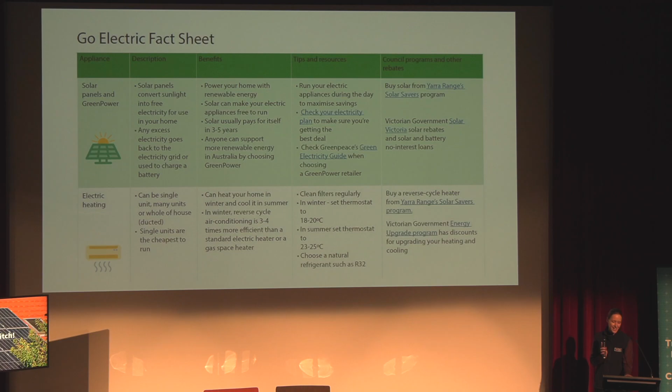And this resource also talks about what the systems are, what the benefits are, and it importantly highlights where you can go to have a look at the rebates that are available, because that's often something that's important and can really help. And so currently there are state government rebates for solar panels and hot water heat pumps, and they range from $1,000 to $1,400. And there are also interest-free loans available. But these change periodically, so it's important to know where to look.

And the last column also mentions the Solar Savers program, which is a council-supported program. Solar Savers was created when a group of councils banded together because they realised that it can be quite overwhelming for community members to know where to look. There's so much information out there, which installer do you trust? It can be very confusing. And so the idea is that this program exists to make it as easy as possible for you to install these appliances. So the idea is that they've done the hard work for you.

And there are currently 18 councils that are involved across Victoria that are involved in this program. So how it works is that you register your interest online. It's important to note that it's not just solar panels that this program offers, but it's also batteries, hot water heat pumps, and split systems. And so you answer a couple of questions that are specific to your home, and the Solar Savers team reaches out to you.

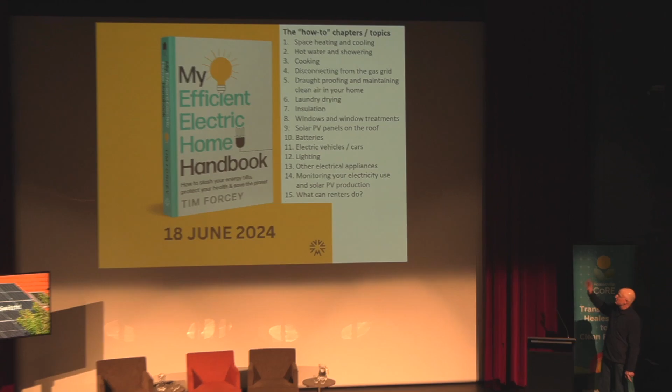Talk about my efficient electric home, how to be healthy, comfortable, and maybe even save $3,000 a year. So how did I get into all of this and this book? There's quite a few chapters in the book, and it goes through the whole lot, whether it's about heating and cooling or hot water or cooking or getting off the gas grid, but then don't forget the insulation and the draught proofing and the window treatments and the windows, and how do you maintain good air quality, et cetera. Then finally the solar panels, and should you get a battery, and what about an electric car? So there's all that stuff in there.

But how did the book come about? Well, what happened was 9 years ago, well, even before that, I migrated to Australia to work in the gas industry, and now I tell people don't use this stuff because you've got cheaper and cleaner and healthier options. I left the fossil fuel industry back in 2010, but in 2015 I had a casual research gig at the University of Melbourne, and we looked at a bunch of things. We finally got around to looking at home economics, and we looked at home heating. 9 years ago, we worked out that you could heat your home with a reverse cycle air conditioner for a third the cost of gas.

So why aren't we all doing this? It's like going to the store and there's a loaf of bread, and there's another loaf of bread that costs 3 times more. Which one would you buy? So heat your home with a reverse cycle air conditioner for a third the cost of gas. And now I'm still banging on about this 9 years later.

One problem: when we published this report, we got a little bit of media, but we published it on the last day of winter. And guess what? The next day was spring, so nobody cared anymore.

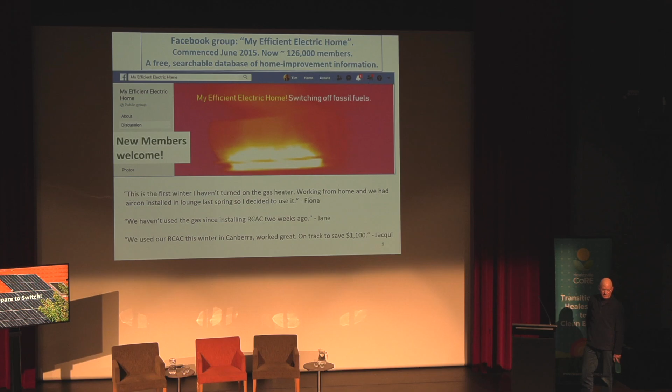You can get in there and ask, how can I bubble wrap my windows to make them warmer, and you'll see a discussion. But it's also probably the world's largest database on this sort of stuff because it's searchable. There's the little magnifying glass, so you could type whatever you want in there. Type in Healesville, or solar savers, or bubble wrap, or whatever it is, and you'll find posts going back 9 years. I can find the original post that I started this group with.

So it was a useful way to spread the word that people can save money by not using fossil fuels, getting onto a reverse cycle air conditioner. But it also validated what we had said at Melbourne Uni, that people could save a lot of money. Now we have tens of thousands of case studies of people who have electrified their homes, heating with reverse cycle air conditioners, saving thousands of dollars across the winter, like Jacqui down the bottom: 'We used our reverse cycle this winter in Canberra, worked great, on track to save $1,100.' So it was good to see the theoretical numbers we worked out at Melbourne Uni were actually coming true for a lot of people out there.

Another thing I started over the last few years is a business. I actually go into people's homes and offer advice on all the things they can do. I'll spend 3 hours in a home, and this is what we're doing: shutting off these old ducted gas heaters, which are past their use-by date anyway, and helping people learn how to heat with their reverse cycle air conditioners and save a lot of money.

And what we just heard from the authorities, the Australian Energy Market Operator, who I also worked with for a couple of years, they just published a quarterly report, and they've noticed finally that the use of gas in Eastern Australia is now falling. It hadn't been growing for a few years, it had been kind of flat, but now it's actually falling, and this is even with a winter that's been particularly cold. So we've had a particularly cold winter, and yet gas demand is falling. I can believe it, some of these gas heaters we've shut off, oh my God, they were using so much gas. People are spending $25 a day on gas, for example.

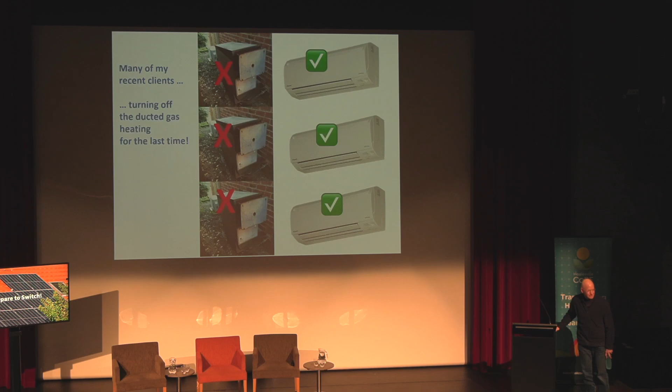So we're shutting some of those off, and now we're starting to see the impacts that the demand for gas in Eastern Australia is actually falling. Of course, we're still exporting most of it. We export like 85% of the gas that's produced in Australia. But I guess the goal is someday we'll be exporting 100% because we won't need to be using any in Australia.

So this is now a thing, abolishing the gas meter. If you can get off the gas heating, the gas hot water, the gas cooking, you ring up the gas supplier and say, look, you can see I'm not using any more gas, why are you still sending me a gas bill? And they'll probably organize to have the meter taken away, which is excellent because sometimes it's a really good spot for a pot plant.

But we do see the celebrations on My Efficient Electric Home. People will put up a post, and today's the day the gas meter's leaving, and they'll go through their whole home story about how maybe they've been at it for 3 or 4 years, but they finally got to the point where the gas meter disappeared, as well as the bill. I often ask people, put up your hand if you want to get a gas bill for the rest of your life. And I've not yet had a person put up their hand.

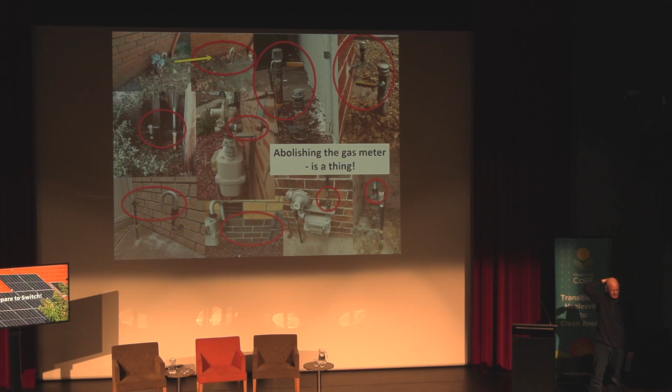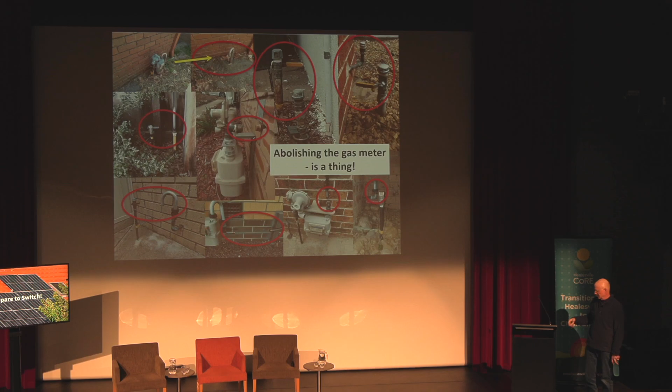So, you're probably going to stay on the electricity grid, but you can get off the gas grid. And of course, we'll hear later tonight from Rewiring Australia about getting off the petrol grid and getting off all of those fossil fuel grids and just using renewable energy.

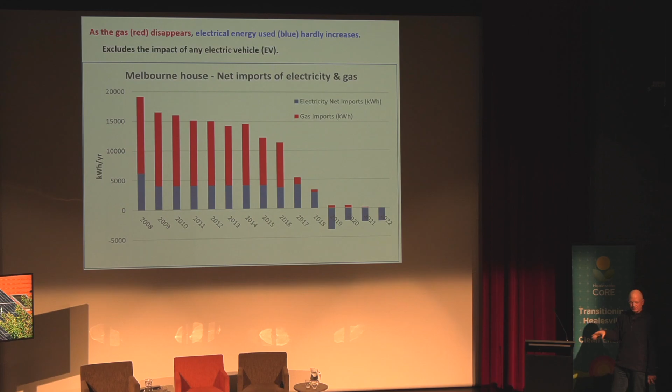In terms of dollars, we still get about a $600 a year electricity bill. We run an electrically heated spa, a luxury item, which uses as much electricity as the rest of the house. Otherwise, our electricity bill would be even less than $600 a year.

But if we go back to 2008, if we'd never made all these investments, our home would be costing us $3,600 a year. So that's the $3,000 a year savings you see from heating with the air conditioners, getting the solar panels, the hot water heat pump, and no gas bill. You pay about $1 a day to be connected to gas, so that's $365 you can eliminate when you get rid of the gas bill.

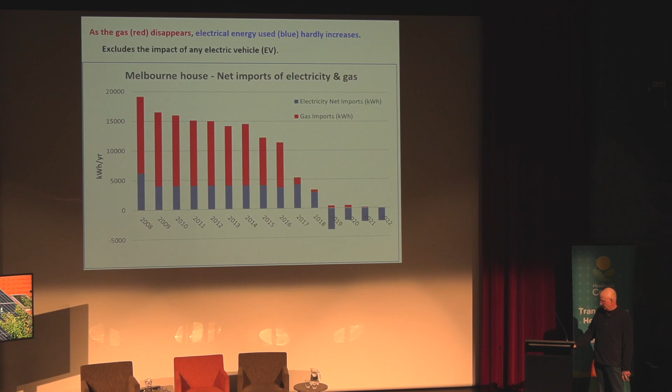Just before we get into how you can improve your homes, I always need to remind myself, we do have this climate emergency. Though it's great fun meeting with you in Healesville and selling a book and doing stuff I never thought I'd do, it actually comes back—I'm not just here to save you money, it comes back to the climate emergency.

We see some graphs like this, where we see the world's global temperatures going through the roof. Whether you look back 20,000 years or just 100 years, we can see the temperatures shooting through the roof.

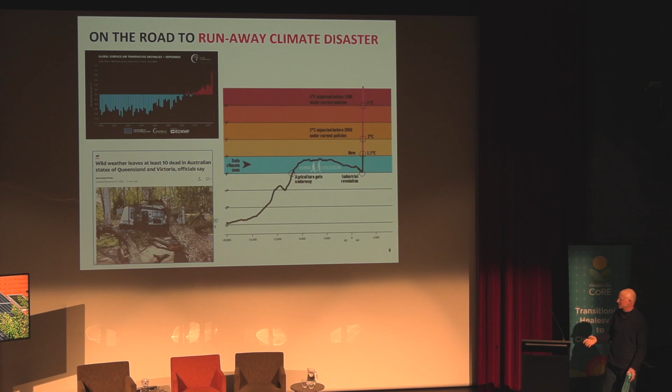Now, I trained as a chemical engineer at university, and I used to work in oil refineries and chemical plants and offshore oil platforms. You'd design stuff so that it didn't blow up, that it didn't go out of control or run away, and you'd monitor temperatures, pressures, etc. So when I first started to see these climate graphs the scientists were producing, a chemical engineer looks at that and says, whoa, we've got a system out of control, so we need to get it back in control. And that's where we're at.

These are pretty scary graphs. I wrote a book—that's one little thing I can do to try and help the situation. Perhaps you all improving your homes somewhat, in addition to saving money, will be the little thing that you can do to address the climate emergency.

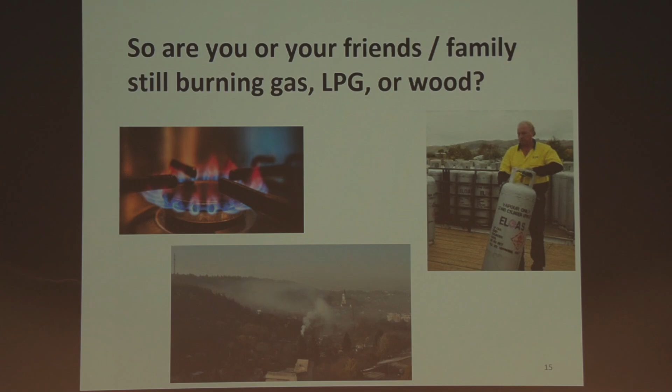Anyway, back to home heating. Heat with the air conditioner. Don't burn anything—we've got an expression, my efficient electric home, it's where we don't burn stuff. So we don't have to burn gas, we don't have to burn wood, we don't have to burn LPG. There's better options, and that's the reverse cycle air conditioner.

How does it work? Now here's the challenge: a reverse cycle air conditioner is a split system, it's a heat pump. How do they work? Why are they so cheap? It comes back to the technology of the refrigerant system of the heat pump.

Using a refrigerant system in its cycle, if you're using a reverse cycle air conditioner and you go near the outside unit, it is freezing out there. You might think it's just because it's blowing air around, but no—it's because there's refrigerant in there that's minus 25 degrees, and it's blowing air around so it can extract free renewable heat from the environment. So I don't care if it's -4 in Coldstream or whatever, there is still heat in the air that will flow into that minus 25 degree refrigerant and warm it up a bit. There, we've captured this free heat.

Then the refrigerant goes through its cycle, goes through the compressor. Now it's hot enough to come into the inside unit where there's another fan, and you can blow the heat off the refrigerant and into your home.

And then the refrigerant is cooled down a little bit, then it goes through an expansion valve, goes back down to minus 25 degrees and does the thing all over again. So that's the refrigerant cycle, that's a heat pump cycle. It doesn't so much generate heat as it goes outside and finds free heat out there and brings it inside.

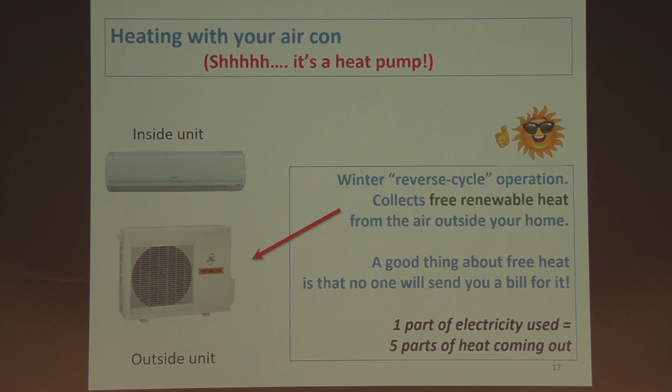So these things can run at 400, 500% efficiency, which means you buy 1 unit of electricity to put into them, you can get 4 or 5 units of heat coming out of them, and that's why they're far cheaper than gas, and far cheaper even than electric heaters. These electric heaters might be 100% efficient - you put in 1 unit of electricity, you get 1 unit of heat coming out. Sounds great, but they're not heat pumps, so they're not going to give you 3 or 4 or 5 times as much heat for that same use of electricity.

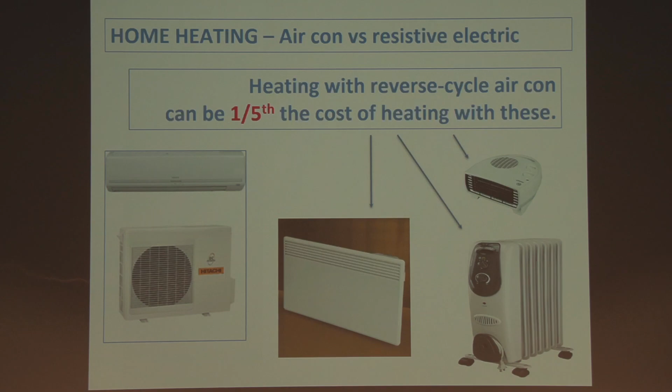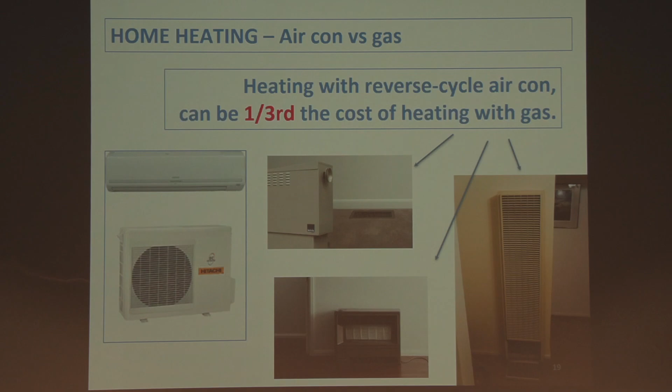So avoid using electric heaters if you can instead use a reverse cycle air conditioner. And avoid using gas. When you buy gas, the first thing you do with it is set it on fire, and you lose a fair bit of the heat up the flue stack or chimney. So these gas units are all less than 100% efficient, and the gas industry really can't compete anymore with reverse cycle air conditioners.

Just a warning note with gas units - if you're still using a gas unit or LPG, make sure it's not putting out poisonous carbon monoxide. You should have these units checked not less than every 2 years, even your ducted gas heating, to make sure it's not putting out carbon monoxide.

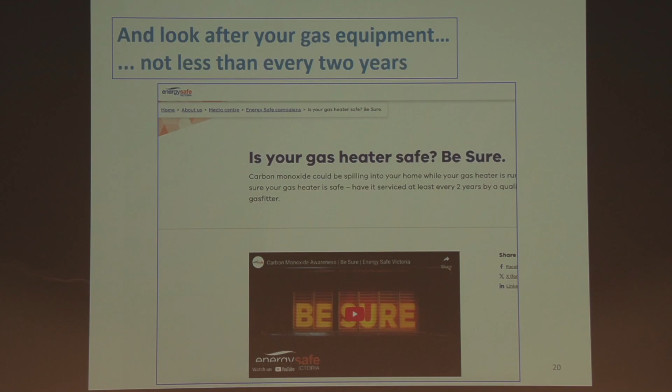I had one set of clients who proudly showed me their carbon monoxide detector. They weren't that old, about my age, but they were going to sleep at 5:30 in the afternoon, and thought maybe they were too young to go to bed at that hour. It turned out their gas heater was trying to kill them. So they were proudly showing me their carbon monoxide detector until they could get to the point where they could be heating with the air conditioners.

Wood as well - there is no safe level of smoke to breathe. So if you can avoid burning wood, that would be excellent for your health, the health of your family, the health of your neighbors. Try a reverse cycle air conditioner - it could be a lot more convenient than having to gather up wood and set it on fire.

If you happen to have solar, and if the sun happens to be shining, which doesn't necessarily arrange itself that way all the time, but there can be occasions in our home in winter, say it's 3 o'clock in the afternoon, I'll turn the air conditioner on to heat the house because I've still got electricity coming from the panels. Might as well heat the house a bit from 3 to 5 p.m., then I'll shut it off at 5 p.m. once the sun's gone down and we get into peak electricity demand time. See if you can ride through without turning the heater on again.

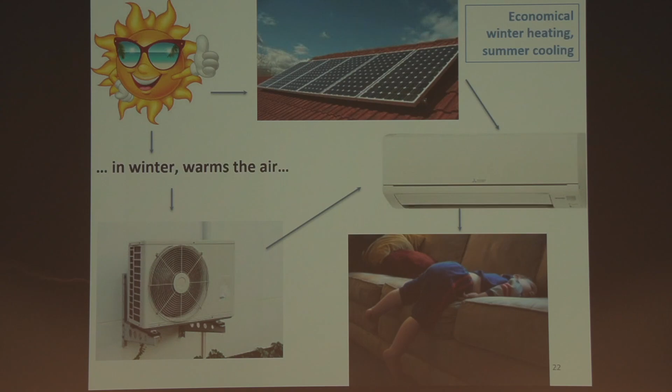So that's one way of time shifting the use of energy, if you can preheat the house that way. Anyway, you don't get paid much these days for putting electricity onto the grid, so this is extremely cheap heating if the sun happens to be shining. So find that heat button on the air conditioner - it's the one spelled H-E-A-T. Push it, get some of that fairly low-cost heat coming into your home.

Again, the gas industry says this is all too expensive to do. And yes, you may have to go down to the shop, get a couple AA batteries, put them in your remote control, because maybe the remote is dead since you last used the air conditioner in summer. Get those fresh batteries in there, push the heat button, and start saving immediately. You'll pay for the batteries in about a day. So that's one way to do it.

And if you don't have air conditioners already, there are very significant rebates and incentives available from the Victorian government, thousands of dollars off, if you want to get an air conditioner or air conditioner heating system. So long as you're getting off gas heating, the Victorian government will support you to the tune of thousands of dollars. So it's all kind of amazing.

I didn't actually expect the Victorian government to do that. So check it out. If you could use some more in the way of reverse cycle air conditioners, get some quotes and you'll see the deduction for the Victorian Energy Upgrades Program, which could be worth thousands of dollars.

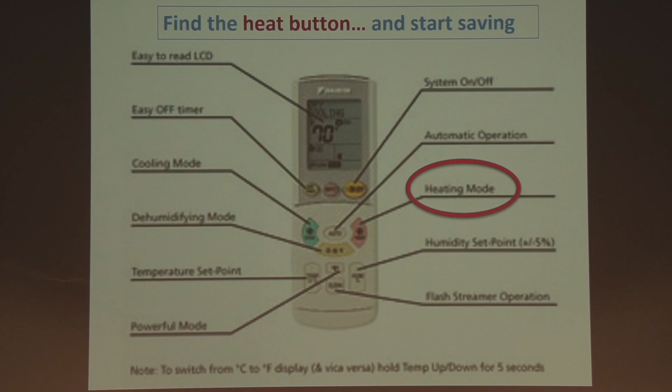Sometimes people will have air conditioners and when I come to their home they say, Tim, I knew you were coming, we tried the air conditioner, it didn't really seem to heat the house that well. And it's because of this. I'll say, well, is the filter clean? And they'll look at me and say, the what? Is the filter clean? Well, they didn't know there was a filter.

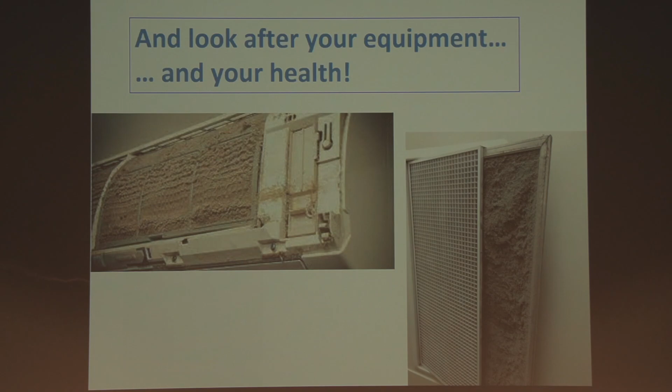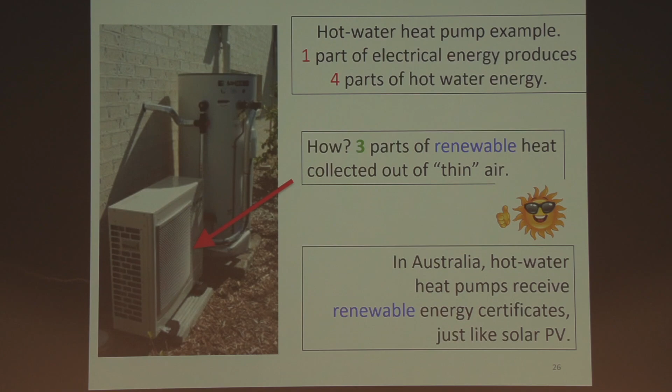Now this is something you probably can do. If you get a hot water heat pump, mine's set on a timer, comes on at 11 o'clock every day, which is when I'm most likely to have a fair chunk of solar coming out of the solar panels, unless it's raining in Melbourne. We use the electricity from the solar panels to run the hot water heat pump. It only needs 800 watts, so less than a hairdryer. It'll run for 2 or 3 hours, makes sure the whole tank is full of hot water, and then I'll have a shower at 6 o'clock the next morning, or when I get home tonight.

So that's kind of using your hot water heat pump as a battery, that you charge up at noontime, and you can have the shower whenever you want. If you can arrange it this way, this is practically free hot water, using your solar panels and an efficient hot water heat pump like that. The gas industry can't compete. Again, there's thousands of dollars off from the combination of the federal government and the Victorian government coming to the party to help you get a hot water heat pump.

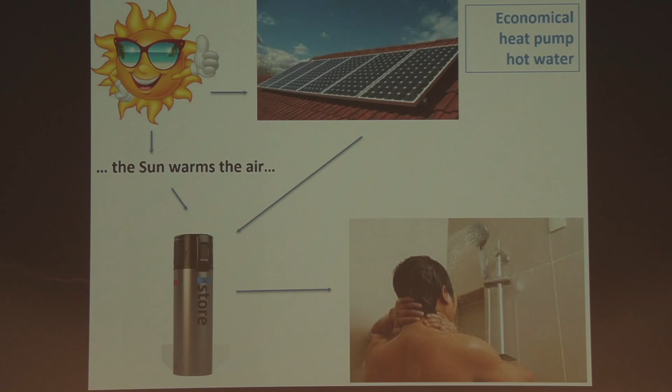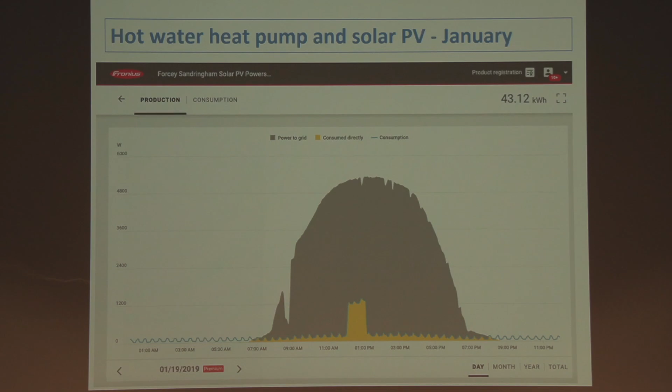So there you go. But also, check out your shower heads. You really don't need to use more than 8 liters a minute with a good shower head to have a nice shower. So grab a bucket and make sure that your shower heads aren't excessive.

All right, cooking. That's the other thing. Let's not burn stuff to cook. Gas cooking in the home contributes to 12% of childhood asthma and also other health issues, because when you burn gas in the home, it's giving off carbon monoxide, unburned methane, moisture, nitrogen dioxide, sulfur dioxide, benzene, formaldehyde, particulates, the whole thing. We don't need to do that in our homes anymore.

I mean, my grandmother cooked over coal. She thought it was pretty cool. And then when gas came out, everybody said, well, gas is cleaner than coal or wood, isn't it? How lovely. But we don't need to use the gas anymore either, because it does have its health effects, as well as potential safety effects.

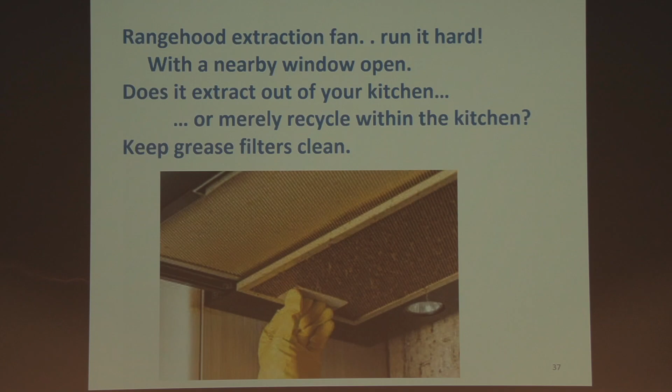But similar to the air conditioner, make sure the grease filter above in your range hood is clean, for any type of cooking. If you're gas cooking, make sure it's clean to try and get all those contaminants, the nitrous oxide etc., out of the house. Crack a window open nearby, run the extraction fan hard, try to get the pollutants out of your house. But even if you were cooking with induction, you'd want to do the same thing. So keep that clean. And then get rid of the gas meter - like I said, you pay $1 a day to be connected, so you don't have to do that anymore.

I mentioned that I migrated to Australia to work in the gas industry. In those days, it was like with BHP and Esso. I'd go down to Longford or Sale, or get on the helicopter, fly out to the platforms in the Bass Strait. It was amazing - they discovered all that oil and gas like 59 years ago, and they looked down and said, there's so much gas here, we could run an entire state, an entire city off of this gas for 60 years. And like I said, they discovered it 59 years ago.

So the Victorian government's well aware that we are on the last legs of the gas coming out of the Bass Strait. More and more of the gas we'll be using in Victoria, if we keep using it like we always have, will come down the pipelines from the Queensland coal seam gas fields. It goes all the way over to Moomba and then comes down either to Sydney or South Australia and then across to Victoria. This is where our gas is going to be coming from in the future, because we're in year 59, year 60 of the Bass Strait.

And there are other crowds looking at bringing liquefied gas in by ship into Geelong. That gas could come from the Queensland coal seam gas export facilities, from Western Australia, or it might come from Russia, who knows. But we do know it won't be cheap, and gas today can't compete with electrical technologies. They're sure not going to be competing in the future.

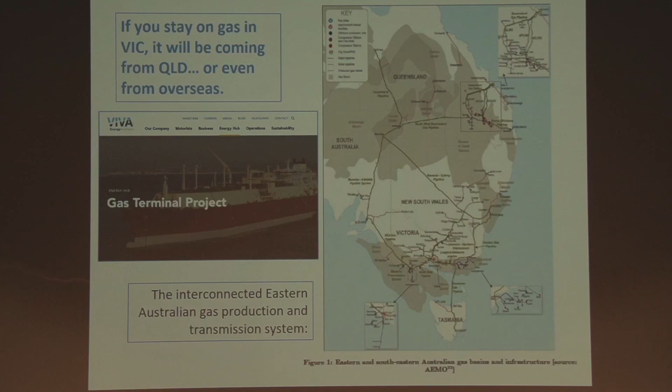And it was in the news over the last few weeks, perfect timing again. The authorities were saying we're getting a cold week, and if anything should happen to fall over in the gas supply system, guess what - we got 6 hours before they'd have to start making phone calls to industry and say, look, back off on your gas use so that we can keep the gas flowing to Warburton or wherever, or Healesville.

Now, I think we're probably through that coldest period of the winter, and so we won't see these headlines again until next year. But next year, there'll be even less gas coming out of the Bass Strait, more gas coming down from the pipelines. They won't be bringing the gas in by ship to Geelong at that point in time just yet. And so again, next winter, we could be looking at a gas crisis.

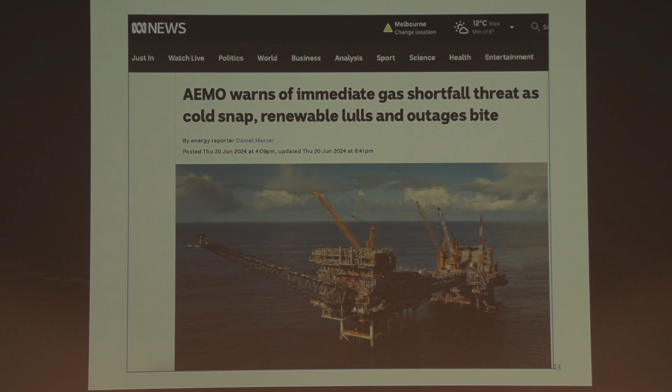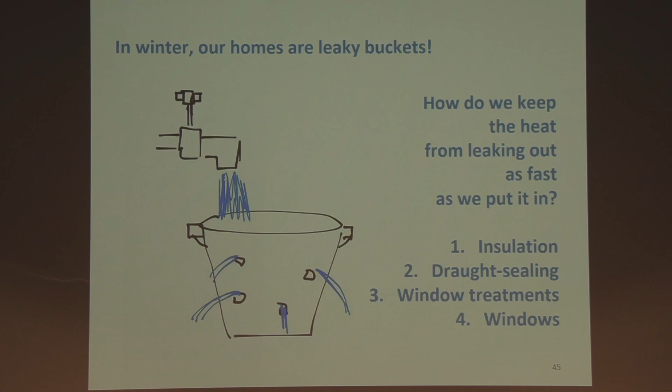Alright, now that's all the gas stuff. There's other things in the book, other things to talk about in a home - the insulation, the windows, the draft proofing - because your home is like a leaky bucket. You try to put some heat in there, it's not a thermos bottle. And so as soon as you put the heat in, it's starting to leak out. So see what you can do to keep the heat in there.

Insulation - this is tip number one. If you've got a roof space and you haven't looked up there for a while, you might say to me, Tim, I've got insulation, I know I do, we put in the Pink Batts. Yeah, but you forgot that someone went up there to fix a roof leak, and then another person went up to change a light bulb, and then another person went in to install the NBN. By this time, all your insulation that was on the right went over to the left, and all the insulation that was on the left went over to the right, and no one put it back where it was meant to be.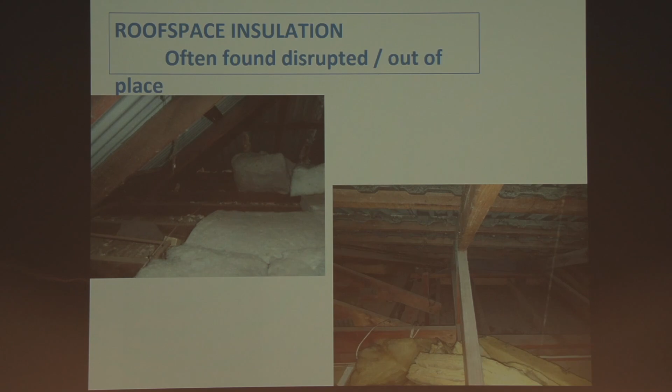So I see this all the time, where there is insulation up in the roof space but it's all been strewn about. Your insulation has to be perfect - if you've got a few little gaps, the whole purpose of the insulation is pretty much destroyed. The analogy I use is if it's a cold night and you've got a doona but your leg's hanging out, you're not going to have a good night's sleep. So the same way with your roof space, the insulation needs to be thick and perfect.

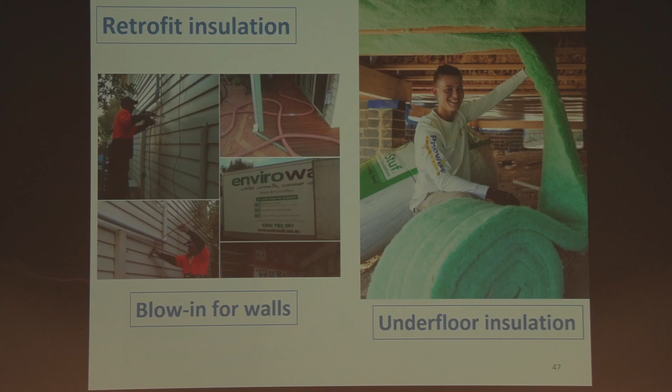Under floor and in walls, you can retrofit insulation if you can get under the floor, and there are companies that can blow fiberglass insulation into the walls, whether it's a brick building or a weatherboard. That's our weatherboard house that they're fixing up - one wall for us with the blow-in insulation. Windows, of course, are also very important.

A tip for some people, whether they're renters or homeowners, is bubble wrapping the windows. That's about the cheapest way to double glaze. It works. Get some bubble wrap, spritz some water on the window, and you can stick the bubble wrap to the glass. Boom, job done. You've double glazed, in a sense.

My daughter was in a rental and my grandson's room was quite cold, with condensation on the windows in the morning. So we bubble wrapped those windows, so no more condensation, and the room was a lot warmer. There wasn't a lot to see outside anyway, and it was a rental, so that was one way for them to get through the winter.

It works. Our climate isn't 20 below outside like it was where I grew up in America, it's not that cold. So anything we can do to our windows, whether it's bubble wrap, this cling wrap sort of approach, secondary glazing with acrylic plastic, or finally double glazing, will do a good job. But also curtains and blinds will do a great job when you put them down at night.

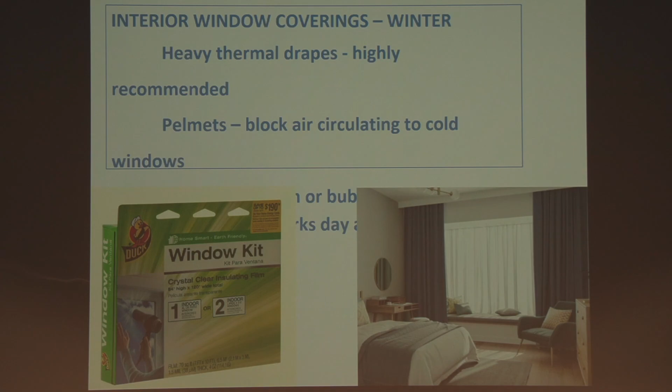Draft proofing, yes, draft proof. Draft proofing your home can put you in better control of your air quality. Certainly during the horrible bushfires from 2019, 2020, there was a bit of a rush on draft proofing because there was so much smoke about. People found they couldn't keep the smoke out of their house because their houses were leaky. So that can be a reason to draft proof, not only to keep the energy in, but also to keep the smoke out from the bushfire or from your neighbor's barbecue or whatever.

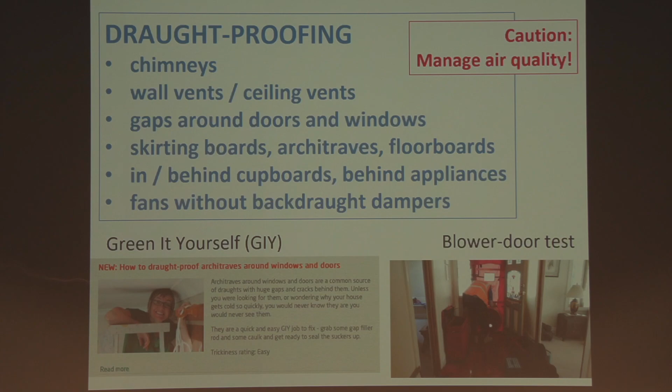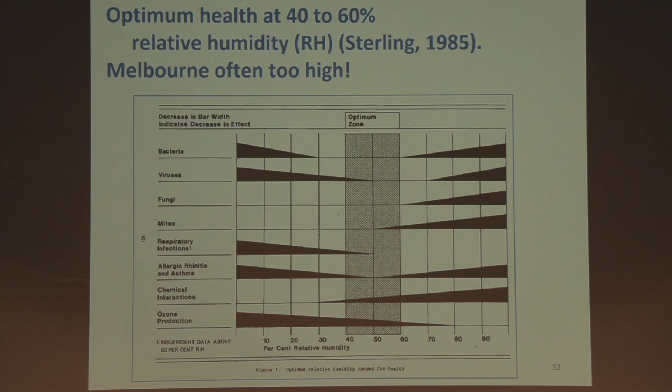Or, closer to Melbourne, we've had a few factory fires lately. So you're better off if you can get through those disaster situations by sitting in a house that's relatively sealed up. But then you have to open up the windows appropriately to get the carbon dioxide you've breathed out of the house and other contaminants, and also manage moisture. Otherwise, you can have issues with condensation and mold. So managing moisture is an important thing, which I cover in the book.

One tip: do not hang laundry around the house to dry with the windows closed, because that can put excessive moisture into the home. It occurs to my wife and myself, we never saw people hang laundry around the house till we moved to Melbourne. Some people say, well, I thought it was efficient. And sure, with those old style clothes dryers, they're pretty horrible, about 1 Energy Star, so you don't want to use those either. Unless it's vented to the outside, it just spews moisture in your face.

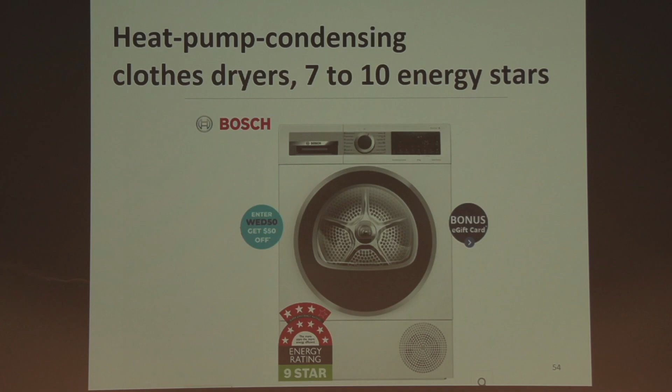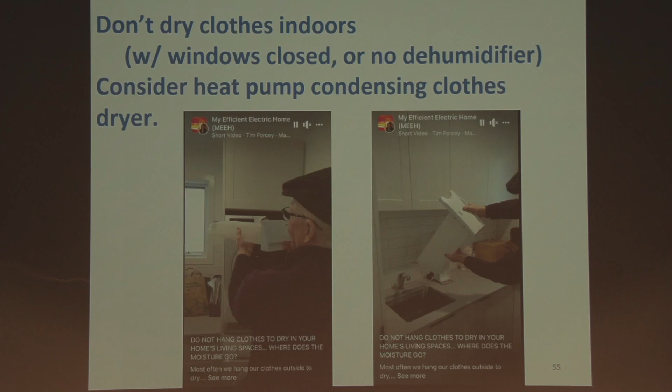And I think that's probably where I can stop. Yeah, that's close enough. Good. All right, thank you very much.

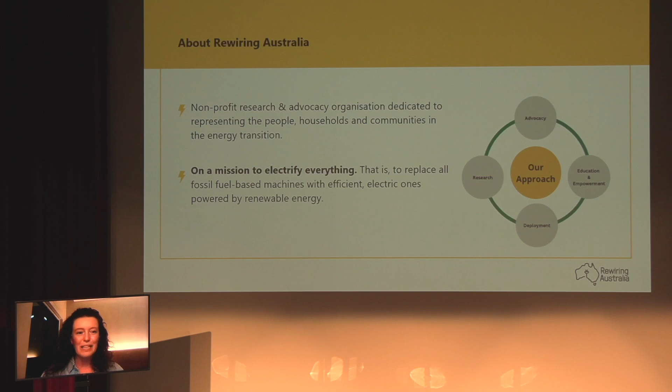Rewiring Australia is a fairly new not-for-profit, only around for a couple of years. Our focus is on research and advocacy, representing people and households in the energy transition — how can we electrify everything as fast and as fair as we can? I've been working with the team for about 2 years. Before that, I spent the last 15 years working with different membership-based organisations on pressing social justice issues and campaigns. This is the fight of our time in terms of how do we decarbonise and make sure it's a transition everyone can benefit from.

I'm the daughter of an electrician and the granddaughter of an electrician, so sometimes I like to pretend I'm a bit of an electrician, carrying on the family tradition in electrifying everything.

Our work is focused around 4 key pillars. Advocacy — how do we take the case to governments to encourage investment in electrification, but also reforms to the energy system to ensure it delivers for households and energy users. Education and empowerment — working with a lot of fantastic community groups around the country, including the guys in Healesville, on how we use community action to drive electrification. Some deployment work, looking at what it actually means to see communities and households electrified and what the tech learnings are, and research.

Our research is underpinned by data, and I think Tim mentioned he only had one graph — I promised to make up the graph quota, because I've got a lot of graphs for you tonight around the data and what that tells us, part of the story of the savings we can benefit from, but also the pathway of how we get to zero emission communities and homes.

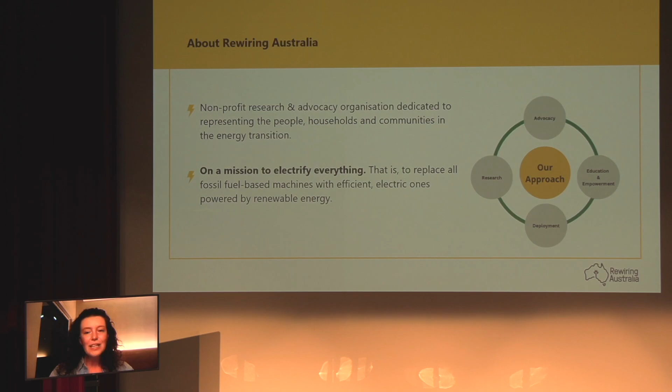I'm sure a lot of you will be familiar with our work through our co-founder, Saul Griffith, who is an engineer, scientist, energy expert, and all-round visionary. He's very inspiring to listen to, talking about the opportunities we have in this transition. He co-founded Rewiring Australia, but also Rewiring America in the US, and worked closely with the Biden administration on investment and fast-tracking electrification and decarbonisation in the States. As Karen mentioned, he's written a book, The Big Switch, which I also encourage you all to read if you haven't had a chance already.

Before I dive into the Australian context, just touching quickly on the US Inflation Reduction Act. My slide's a little out of date — sorry Matt, can I get you to jump to the next slide?

This slide's a little out of date because it's about 18 months ago now that the Americans passed the Inflation Reduction Act, but this was the largest investment we've ever seen in climate change responses in the world. It was an investment of $369 billion, but that's an uncapped amount, so we could see that investment increase as more people take up the incentives within that legislation.

It provides the private sector with about $240 billion worth of investment in clean tech, designed to kickstart that investment and the jobs growth that can come from it, with an expected 170,000 new jobs, which will grow over the decade. A real focus on battery manufacturing and EVs, playing to the strengths in the States, but also wind and solar. At the household front, though, is where Rewiring America had done a lot of their advocacy and saw some really exciting results.

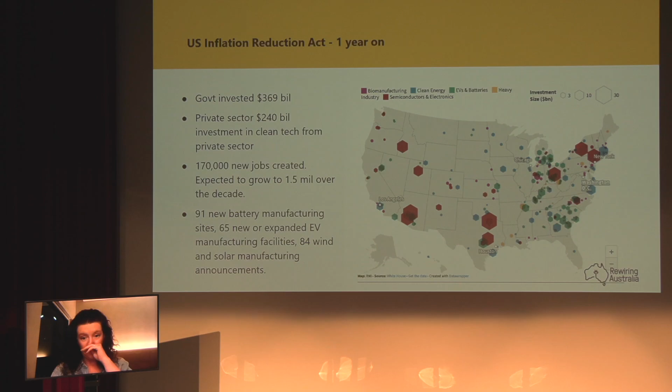So the $30,000 in tax credits to electrify homes, providing incentives for people to make their next appliance electric, which is projected to save around $38 billion in the electricity bills of Americans over the next decade, and make an important contribution to the reduction of greenhouse gases over the next decade. Rewiring America did a lot of advocacy work to see that bill brought into Congress.

In the States, now they're doing a lot of work trying to convince Americans of the benefits of taking up what's available through those tax credits, which is a huge job trying to communicate to millions of homes why they need to make the switch, and the benefits in the long term of reduced running costs, but also in the short term in terms of reducing their taxable incomes.

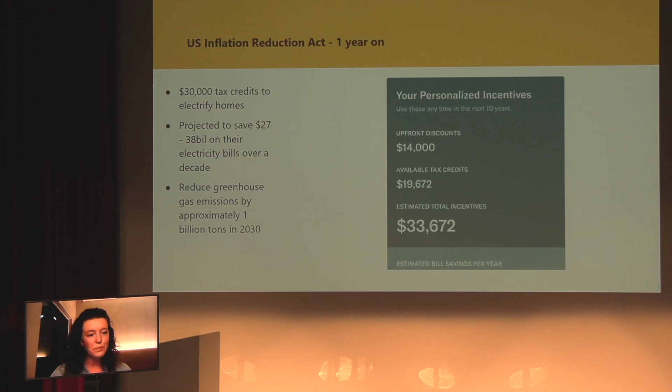So that's a bit of an introduction. I'm going to jump down to why we need to electrify everything. Tim touched on this earlier, but looking at these graphs, we can see that the kinds of action we need to take to address climate change need to happen quickly.

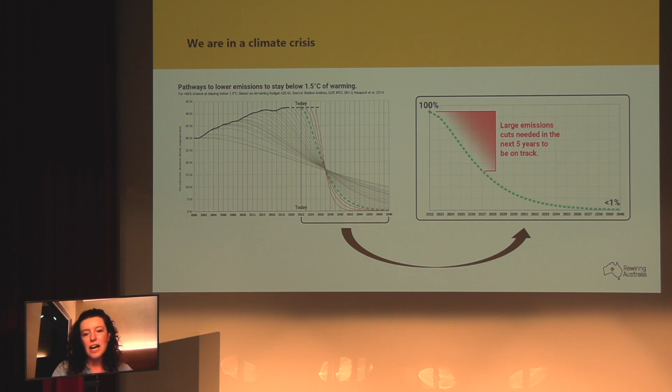The graph on the left, and I apologise, it's probably a graph that is designed, if you're in front of the computer, it can actually zoom in, but it shows that the green line is the massive reduction in carbon emissions that we need to see in order to keep ourselves on track for 1.5 degrees of warming.

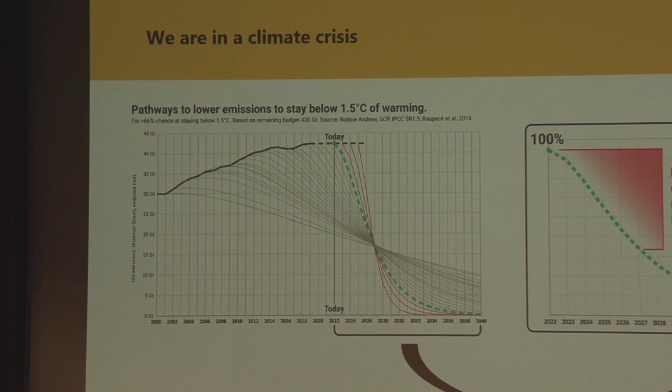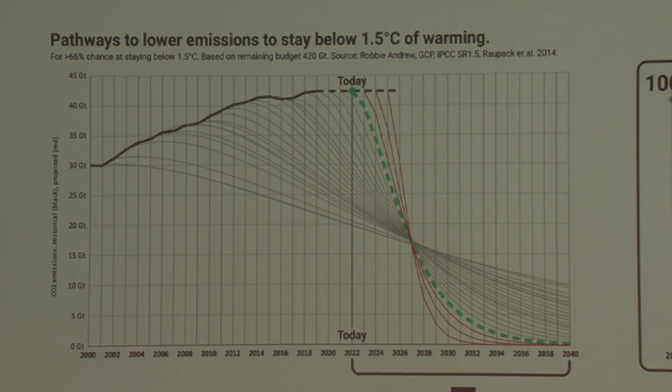I'm reading the latest quarterly essay at the moment, and it's pretty bleak. It looks like we've mostly lost our pathway to 1.5 degrees warming, but we need to do everything we can to arrest further warming. That requires going hell for leather these next 10 years, looking at the large emissions we need to cut over the next 10 years, but also over the next 5, to keep ourselves on track for a livable planet.

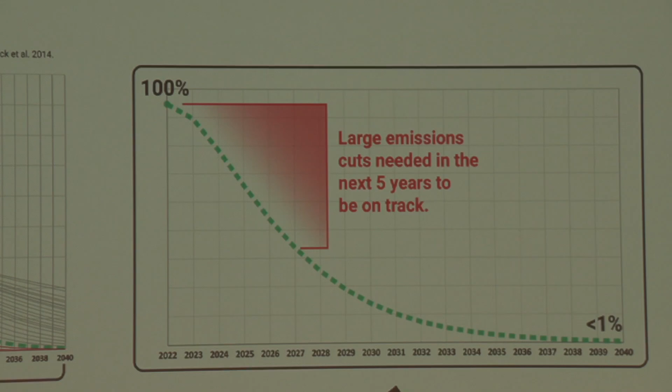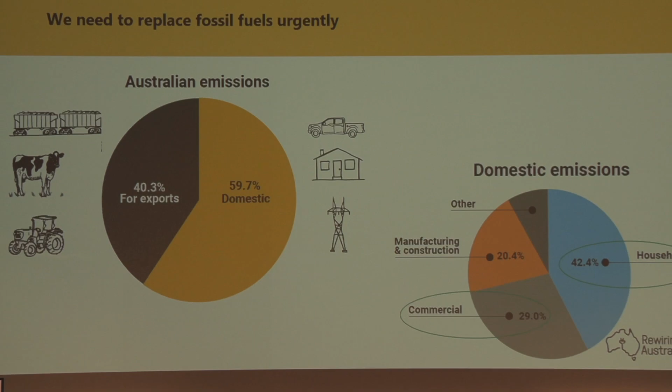When we look at what Australia's emissions are driven by, we can see that traditionally we've split those across the emissions connected to exports and the emissions connected to domestic emissions. Once we look at the domestic emissions a little further, and that's the graph on the right, we can see that households are contributing about 42% of those emissions.

These are decisions that are made around the dining room table, around the kinds of ways we heat our homes, how we transport ourselves, and these are decisions that we can have a significant impact on in reducing our emissions over the next decade. Energy, of course, is a key part of what those emissions are and where we have so much opportunity to reduce greenhouse emissions.

So we look at that challenge of how do we drastically decrease our emissions reductions amid the dual challenge we face around a cost of living crisis. When we look at household annual expenditure, this is data drawn from the ABS: households are spending about $80,000 a year on average, of which $5,000 is contributed to energy costs.

Part of the challenge we face, that we see as an opportunity as well at Rewiring Australia, is how can we pair emissions reductions with energy bill savings. A big part of that is how do we shift our looking from the supply side to the demand side. A lot of our discussions about emissions reductions look at the big machines on the supply side.

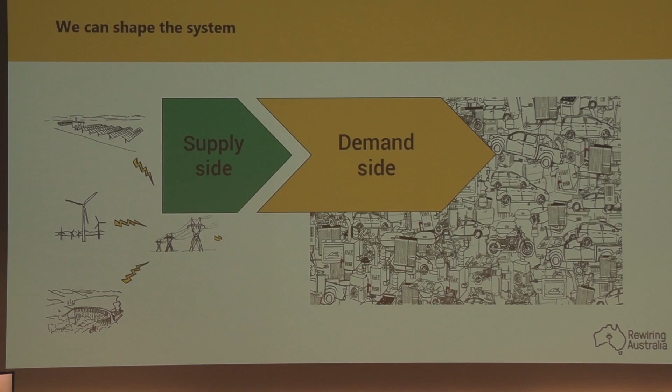Now, this next slide I've got, I realised after I'd sent them across, has a slight typo on it, so ignore all the text on the left side, that shouldn't be there, and just focus on this graph, which looks at energy prices over the last several decades.

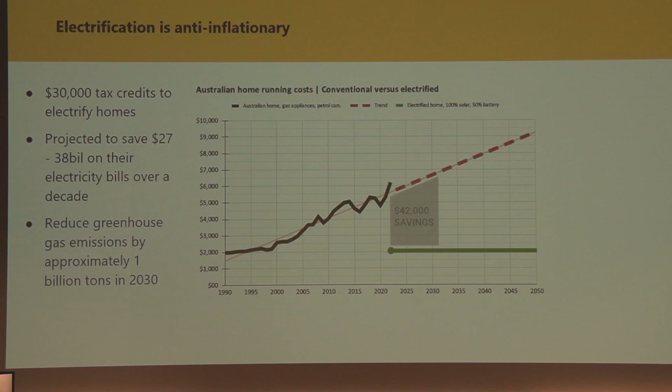We can see that this is energy costs for a home that's being powered part by grid electricity, part by gas. And we can see that electricity prices are inflationary, but they're also incredibly volatile. There's a few spikes in there. Some of them are based on COVID when we're spending more time at home. Another one in there is the Ukraine war when we saw gas prices skyrocket. We're looking at an incredibly unreliable and increasing cost of living.

The red dotted line is the CPI and how it's projected to go forward, or energy costs going forward over time. The consumer price index is incredibly influenced by energy prices, so you can see that trend line is following it up.

But if you were to take a home, replace the gas within that home and the petrol car with efficient electric versions that are powered by rooftop solar and supported by a battery, you take the volatility out of those energy costs, and over the lifetime you can embed about $42,000 worth of savings in running costs. And so we see this as the huge opportunity of why we should electrify. We need to save our planet, but we also have a huge opportunity to lock in those savings.

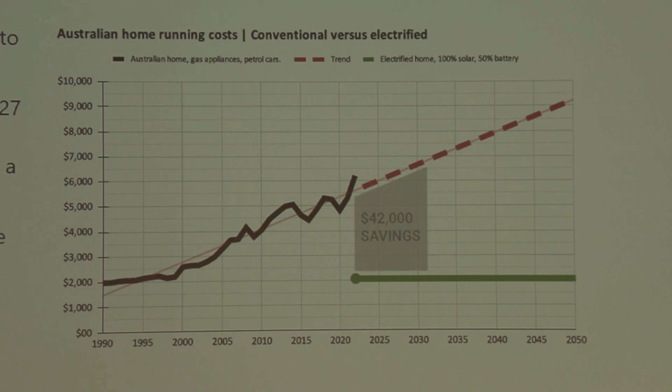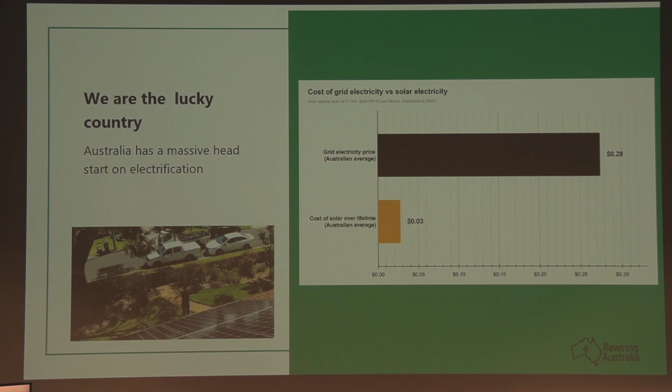We're also the lucky country. Australia has an incredible head start compared to the rest of the world. So this is a graph that compares grid electricity prices compared to rooftop solar. We have some of the cheapest rooftop solar in the world and some of the best adoption rates there is. This is an incredible base to build on in terms of locking in the savings of going electric.

So just to recap on the next slide, in terms of the benefits from households, which I know that Tim's run through as well. I'm sorry, Tim, I feel like I'm repeating a lot of the great points that you've made. But we've got cheaper bills. Modelling that we've conducted shows savings between $3,000 and $5,000 a year. We also have healthier and safer homes, greater energy independence, and a reduced carbon footprint.

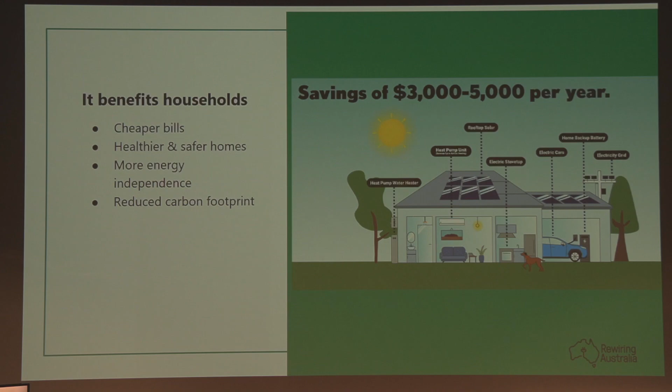When we zoom out and look across communities, we see that communities are more resilient, a more responsive grid, greater job creation. We're not sending money offshore to foreign oil companies. We're being able to keep that in communities, hiring electricians and seeing money stay within communities and support local economies.

So that's the why. I'm jumping into the how now, and I won't spend too much time on this because there's been far more practical guides provided tonight. But as I mentioned, electrification and the opportunities of this are decisions that are based around dinner tables, how we cook our food, how we get to work, where we buy electricity, and how we heat our homes and water.

I feel like this next slide is something you'll all already know quite well, but an electrified home gets off fossil fuels. It replaces gas hot water heaters with heat pump hot water heaters, space heating using heat pumps as well, electric cooking, electric vehicles, rooftop solar and battery storage.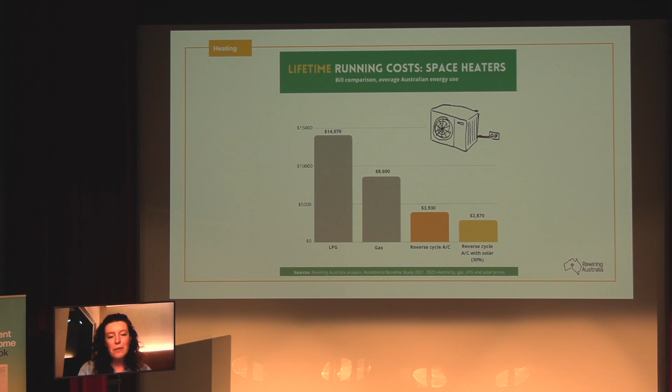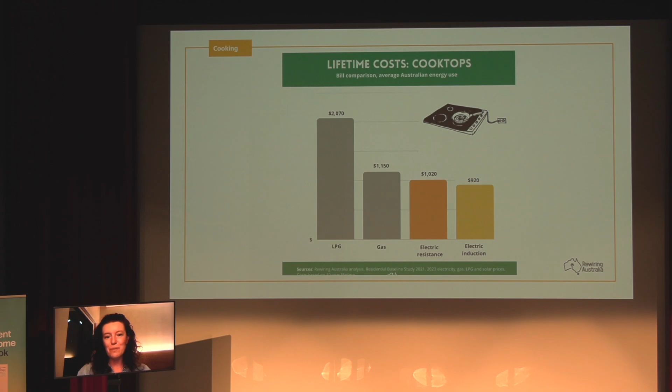The same with cooktops. There's less of an efficiency gain with cooktops, but they're also a machine that's being used a lot less in terms of overall energy use over its lifetime. But there are still substantial savings with cooktops, and looking at the home and air quality improvements, there's a real benefit. And finally, with cars, we're seeing the lifetime running costs, particularly if a car can be charged on solar, substantially cheaper.

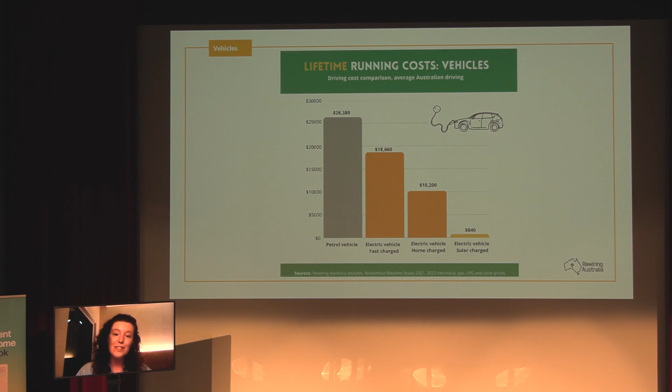On the next slide, in terms of what this looks like for a household, and Patricia referred to this earlier, electrifying a home doesn't mean going out, ripping everything out and doing it all tomorrow. It's about putting together a plan for your cold shower day. The time someone's in the market for a new hot water heater is the day their hot water heater breaks and they don't want a cold shower that night. So making plans across the next 10 to 15 years and replacing things at their end of life is what every household needs to put together. Different plans will depend on what your household looks like and where those appliances are at.

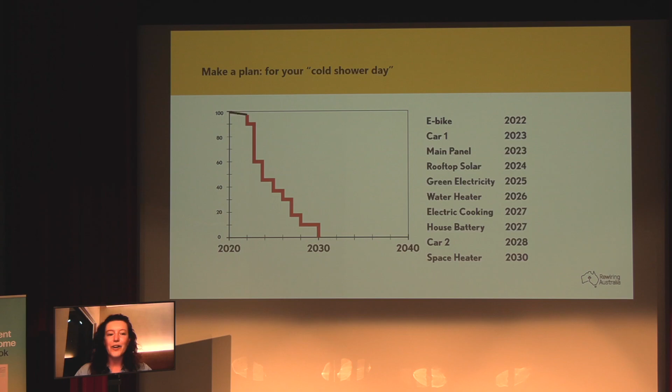Once we look at how these combine across multiple households, we start to see how our communities are able to hit the emission reduction targets we need. The graph in the bottom right corner is the one from earlier, around the drastic reductions we need to see in emissions to stay on target for limited warming. So no matter what a household's pathway is, across the community they're all contributing to the broader goal.

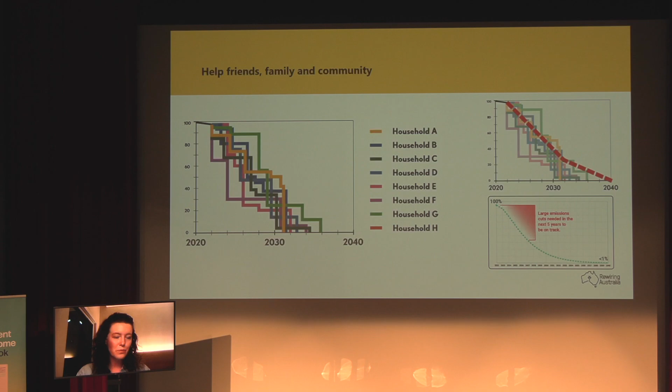But our work at Rewiring Australia is really focused on how we help everyone electrify. When we look at the changes we need to make across appliances in homes, there are 1 million new gas appliances being sold every year.

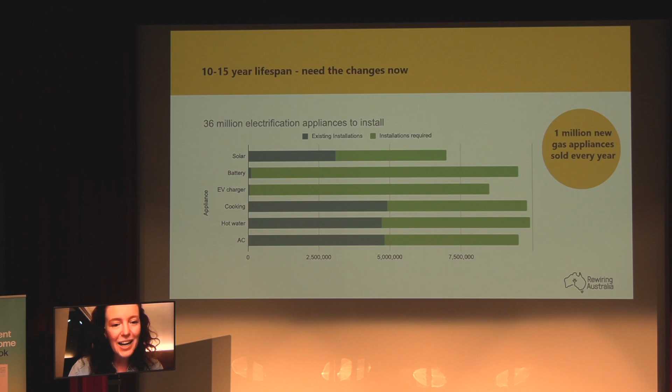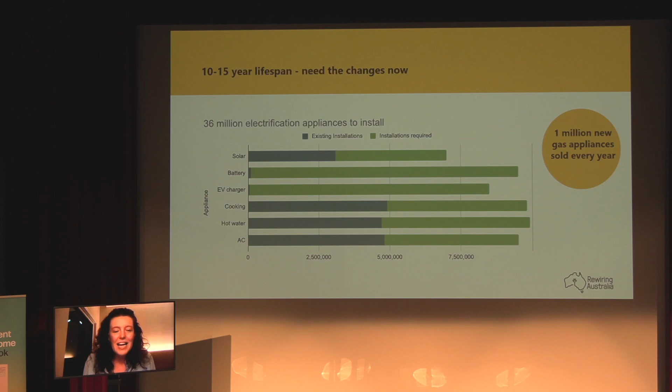However, we're also partway there. If we look at this graph, in blue are the existing installations, the already electric machines. We can see the great track record on solar, but we're around halfway there for cooking, heating, hot water and air conditioning. There's a huge opportunity on EV charging and batteries, but it's a job partway done. We need to make sure every home has the opportunity to electrify.

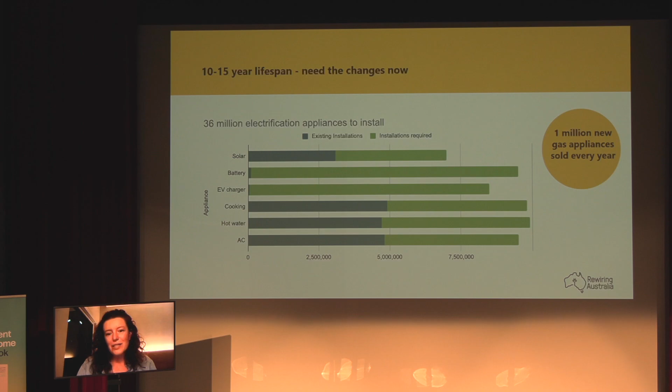In one of our communities in the northern Illawarra, postcode 2515, we surveyed 1,500 residents and asked what their barriers to electrification were. Number one was the upfront cost. It costs a lot of money to replace your appliances. Currently, it's cheaper to go like for like. If your gas hot water heater carks it, it's cheaper to replace it with another gas one than to remove that infrastructure, in terms of upfront capital costs. That will change over time, particularly as gas products become more rare. But the upfront costs are a real barrier for a lot of people.

Those upfront costs are smoothed over the lifetime of the product, with much lower running costs that cancel out the extra money paid up front. But that is a barrier. The other is a lack of knowledge and trust, and I think local councils do great work building those trusted resources. That's certainly been a barrier we've found people face in starting their electrification journey. I think My Efficient Electric Home has also done wonders giving people trusted advice, alleviating concerns, and helping them know where to start.

Current machine not needing replacing is the next barrier. The next two are real challenges we focus a lot of our advocacy work on: renters and people who live in apartments. I'm a renter in Sydney, and like in many parts of the country, you don't have a lot of rights as a renter, and it's a pretty competitive market. I'll jump to some of our advocacy work in a moment, but it's critically important that we find solutions for renters and lean on governments to empower renters to live in healthy, warm homes powered by renewable energy.

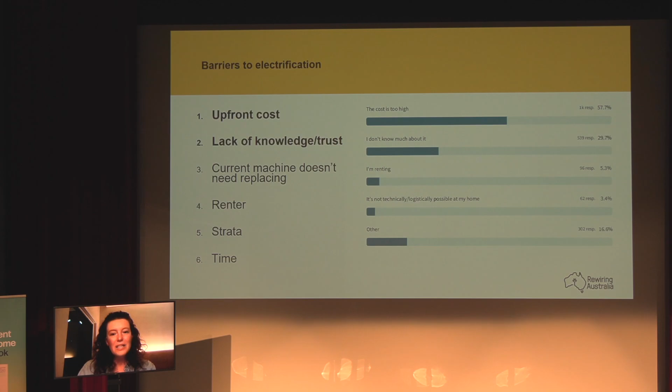So our approach to how we attack some of these barriers that we find, and I spoke through some then, is both a top-down and a bottom-up. We call for the big changes that we see the federal government and state governments needing to make in order to enable electrification that is efficient and equitable. But it's also about bottom up. We can't place pressure on governments to do things unless we can demonstrate that it's something that people want to see happen and people want to see action taken.

So we do a lot of work with groups around the country telling stories around the benefits people have had from electrification and the opportunities around job creation, but also raising awareness around the benefits of electrification and those real life stories. I've seen a lot of graphs of people's savings that they've been able to generate across their home, and they tell a very compelling story. As you might have picked, though, I am someone who does like to communicate through graphs and numbers.

But in terms of advocacy, our key asks are around everyone being able to afford to electrify. So we've done some work putting together a proposal that we've taken to the federal government and state governments around an Electrify Everything loan scheme. The proposal for us, we think, could look like homes being able to take out a loan the federal government supports, where they can electrify everything and not worry about repayments until the next time that they sell their home. We think that would be a great way to take away the risks of upfront costs or the concerns that people have, and just delay the costs of electrifying everything to a time when you've had an opportunity to reap the benefits of the cost savings over the lifetime.